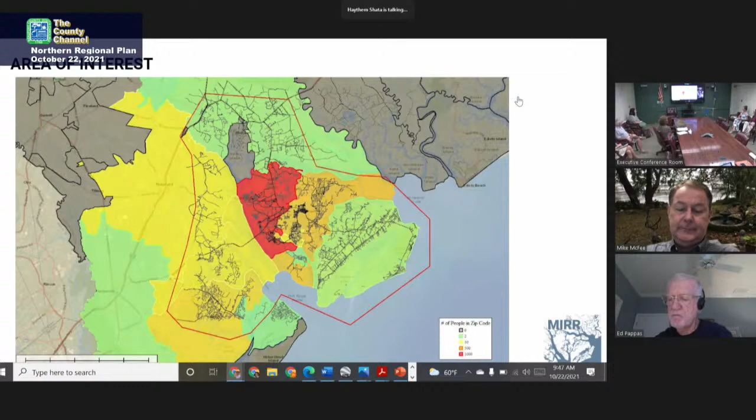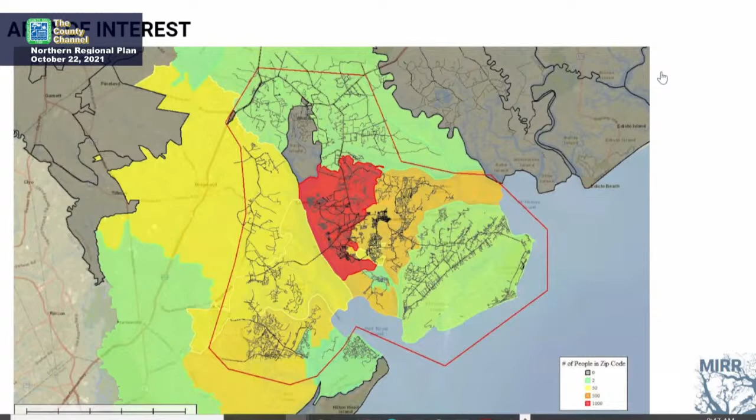Understanding the area of interest and its relationship to the military bases, what we're finding is the community is a large part of the infrastructure, and the infrastructure is a large part of the bases in the community. So that's part of why we aren't just focusing on the bases or immediately adjacent to the bases, but we're really trying to understand the threat, the impact, the unmet needs of the community, the risks involved, and the maps involved with understanding those risks, and creating a series of vulnerability assessments and priority assessments to define projects, responsible parties, and timelines. We are developing maps, and we started some vulnerability assessments, and we wanted to get your input on what we've identified so far.

OLDCC released some new framework items since we last met. Thankfully, it was very close to what we had already started producing. But where we are now is really putting together the assets, the hazards, the exposures, the probability, and understanding the consequences to prioritize and conceptualize impactful projects.

Where we are today is really, we'll show you some of the maps. We started some of the vulnerability assessments. We're hoping to come out there, look at things on the ground, have conversations with people and stakeholders, understanding and prioritize clusters and pilots that can really provide opportunities for impact, but also ability to be conceptualized throughout the study area.

This is kind of our doodle of what we've been doing. We really went from identifying, prioritizing, understanding typologies, starting to intersect those things and interleave with zoning, and validating that as we go with stakeholders and committees like you. Building off of that, we're hoping to apply toolkits that can be replicated and develop a phasing strategy that really understands how to address some of the issues in the community.

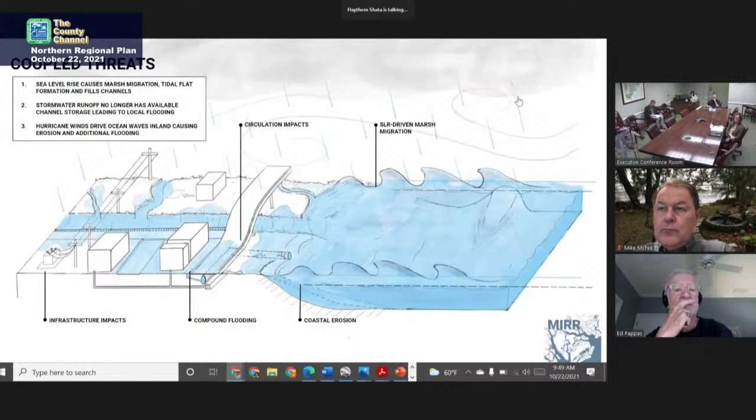This is what we showed you last time. There's really this coupled compounding issue that is occurring today, will continue occurring in the future, and there's low intensity processes that are changing. Your marshes are changing, your marshes are migrating, your marshes are eroding. And then there's also the high intensity event-based impact, flooding, storm surge that we've been building off of.

We reviewed this last time. We took some takeaways from stakeholders and takeaways from meetings. I think one of the most important things we noticed is how regional organizations are really taking initiative, and we should build off of that information and data and provide consistent collaboration, understanding that the military is critical to the community today and in the future, and educating the residents on their risks and on what they can do is an important part of the issue.

Understanding that the environment in the low country is a priority for your economy and your culture, and understanding that we should continue prioritizing cultural continuation in the community, especially with the military groups. And one part of this that we heard a lot of is that we really should think about our statistical findings and analysis in language that is approachable.

We try to simplify it, so please provide us feedback on if it's too simple or not simple enough on some of the recommendations. And we compiled data in a way that should hopefully be helpful for our exercise, but helpful for your future as well.

So there are really two things that we're analyzing. There's climate event, and there's community assets and services, and their interaction creates a risk. And building off of that risk, there's probabilities and there's consequences to those impacts. And so how do we prioritize it?

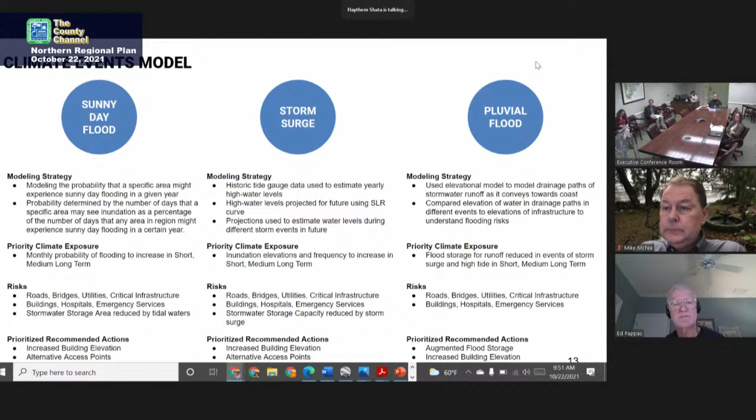Pluvial flooding really is the rain bombs. Your low points that are drained by infrastructure or stream, that when a very intense storm comes in, are areas where runoff accumulates. Building off of that, we looked at the community assets. We're still working on these. Understanding marsh is a strong cultural and physical impact, a physical part of the community.

We took a look back at erosion all the way to the 1800s, but we really started with the 1930s to 2016, highlighting areas where erosion has been a problem and where it can be approached.

For our storm surge and shallow coastal flooding, we showed you a graph last time, but this is more of a map. What we're noticing within this time period is that the risks of storm surge and shallow coastal flooding are approaching a similar elevation.

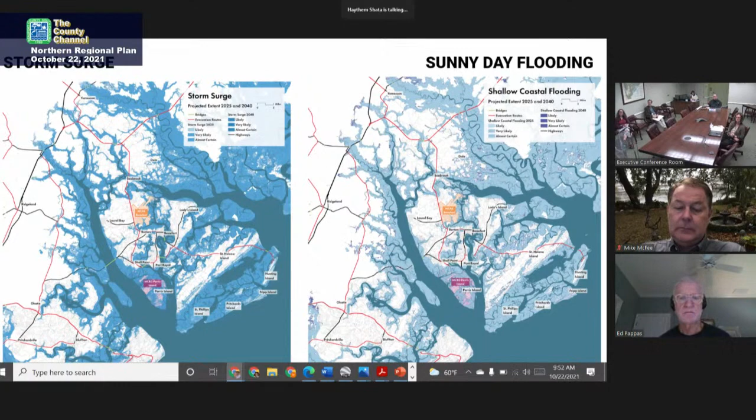So when we think about what you plan for with hurricanes and emergency response, those same impacts may need to be considered as tides get higher and shallow coastal flooding becomes more prevalent. You've probably noticed some sunny day flooding in your past—I heard the king tide last wasn't as high as normal—but some of those elevations do relate to your issues with storm surge.

Combining those two understandings means we need to start thinking about multi-layered resilient infrastructure, similar to what you've already implemented at Mossy Oaks, to address multiple threats and challenges.

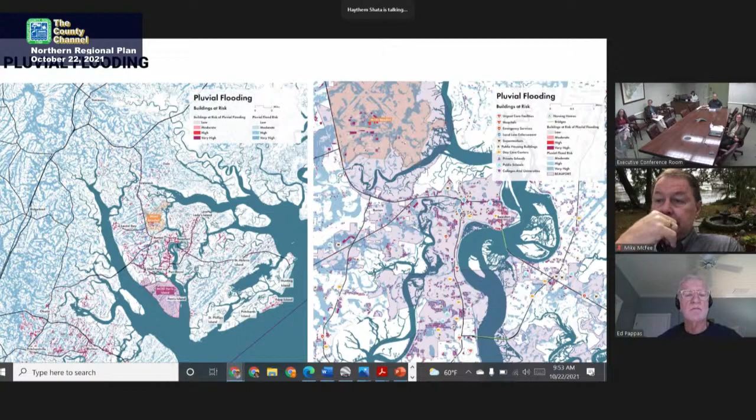Pluvial flooding is a different category, but a similar context—understanding where storage and stormwater areas exist, where they need to be improved or prioritized, and where future storm surge and tides may impact their ability to convey or store.

When it comes to marsh loss, you've probably noticed stands of trees slowly dying off. We are prioritizing areas that have risk of loss within one foot of tidal change or tidal range, and we are prioritizing the largest contiguous areas.

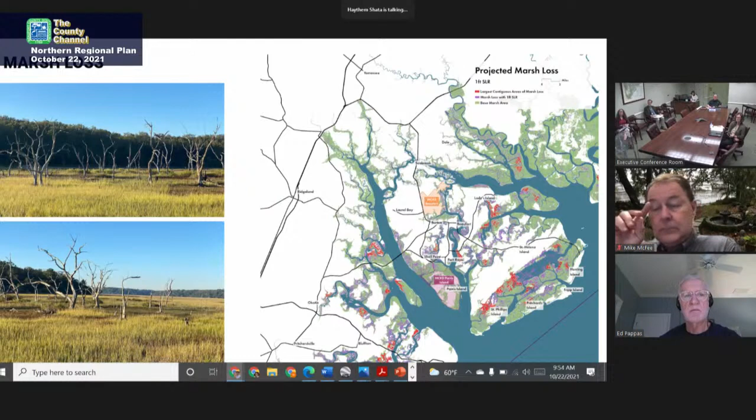We'll start intersecting that with areas of interest—cultural areas, environmental tourism areas—starting off with some of the data of your history, we can zoom in to where priority areas may relate to infrastructure and ecology. I'll take you through one example quickly, and then pause to get some input.

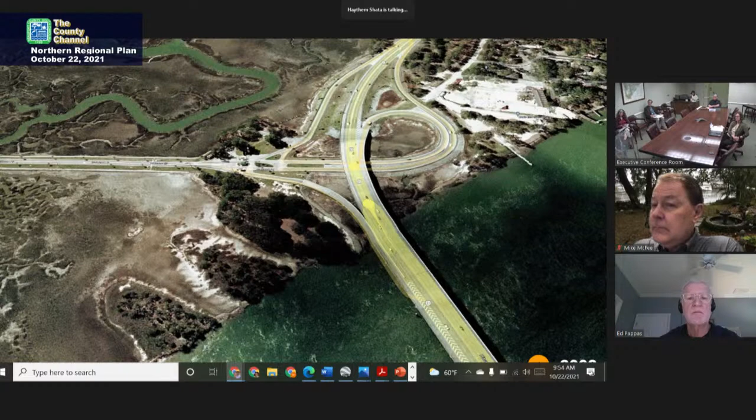One is the junction of 21. Looking back at history and understanding how it's changed is part of our understanding of what we can do.

What we found is when you start seeing the tidal impacts, erosion impacts, and the marshland slowly degrading, we realize there are opportunities for improving drainage and improving ecology in some locations.

Thinking about the resiliency of this causeway and this intersection when it comes to day-to-day events like sunny day flooding, and when it comes to larger catastrophic events that may require prioritization of evacuation.

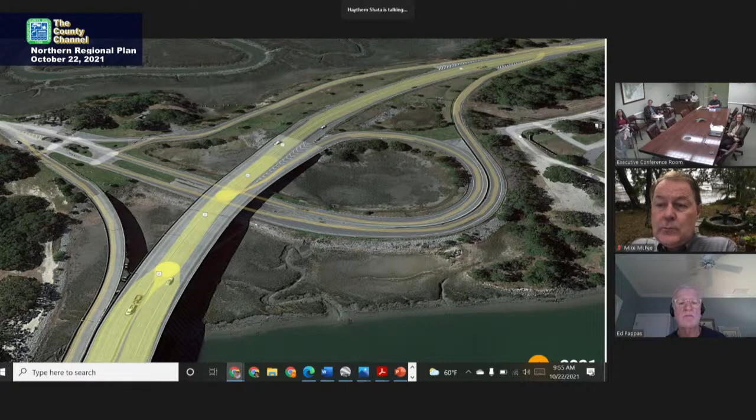What we found with this specific site is that it's a great opportunity and place for a living shoreline technique—embedding living oysters or oyster shells to help armor, but also accrete and allow this shoreline to grow over its lifetime.

I'll pause there and take any questions before telling you our next steps.

I volunteer to eat the oysters to get the shells out there.

This is at the Parris Island Gateway, correct? I'm sorry, I didn't hear that. Is this the Parris Island Gateway? Yes, ma'am. Okay, that's interesting.

Any questions before I keep going?

When you think about this specific area and what we're trying to understand regarding resiliency—you don't have enough room to solve all your problems. What we're trying to do is prioritize problem areas in ways that can be addressed.

When we think about this area's relationship to environmental services, the ecology that exists and used to exist, we also think about its relationship to evacuation and access routes, its impacts during rain bombs, and its impacts during storm surge.

You start understanding that areas like this can be prioritized for getting the most bang for your buck, thinking about future resilience as a way of prioritizing areas of most sensitivity first.

Building off of that is our next step. You saw one of our interactions and intersections, but we're going to do that throughout the county.

We're open to ideas in areas of already larger study. We've mapped your PUDs, we've mapped your areas of septic and water, really trying to understand where other areas have similar compounding issues that can benefit the community and the military as a whole.

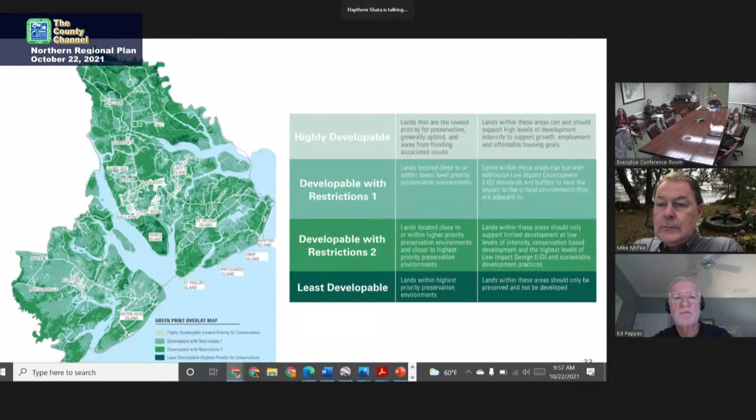We've started understanding the key takeaways and community survey priorities, understanding that not all areas want to be developed, even though it makes sense to develop with the data. We're prioritizing ecology and green infrastructure, understanding where the natural environment and the built environment intersect. We're finding great links between the two, and building off that to make sure our recommendations relate to the hierarchy or tiers proposed in the future development and zoning.

Maybe I'll pause there. We have a bunch of precedents, but I think you guys need to get back to the meeting, so let me know if you want me to keep going.

I would like to put you in touch with our stormwater people, if you haven't already talked to them about Shell Point. They just finished a study of Shell Point, and I can give that to Stephanie. Herrera and Neil Desai had a contractor do a study of that area. It's very similar to Mossy Oaks, and their recommendations would be valuable in your overall look at that area, which is right off of this gateway.

That'd be great. Our key goal is to make sure we have a short time frame for our study, make sure to integrate it with projects being studied, and really provide additional layers that can improve resiliency, but also improve funding opportunities.

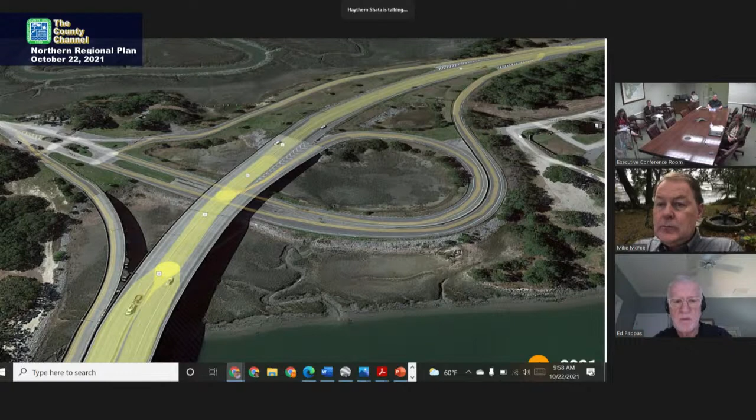I wasn't sure if anyone knows why it's called Shell Point. I'm imagining it's because there used to be a lot of oyster shells there, which is part of why we zoomed in quickly to this site. Mike, do you know the Shell Point history? I'm not sure exactly, but I know there was oystering on the Broad River side, so it's very likely that's where it came from.

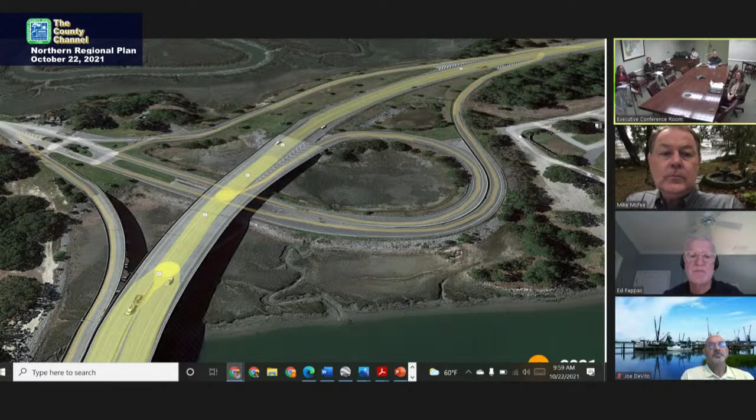When do you think you'd be ready to do the next presentation? And would that be a draft final, or do you have another intermediate step you'd like to do? Let me go back to our schedule.

One thing that's important too is anyone that wants to talk to us, please reach out. We're happy to present more detail with more information. Our goal is to meet with you, meet the technical committee, go on site, and understand what things look like on the ground, and have more conversations. We'll start compiling clusters and thinking about pilot projects and recommended actions, then come back to you and the technical committee, and probably come back again on site to show where these clusters and pilots are feasible and provide more context around those.

So I'd say we're hoping to come out there early November, first week of November is what we're shooting for right now. Happy to meet with any of you folks, and then come December again we're hoping to come out there before we really kick into the draft report in December and the final report in January.

Thank you. Who is on the technical committee? The technical committee is mostly made up of a staff representative from each of the jurisdictions, the county, and then from each phase, the CPLO or...

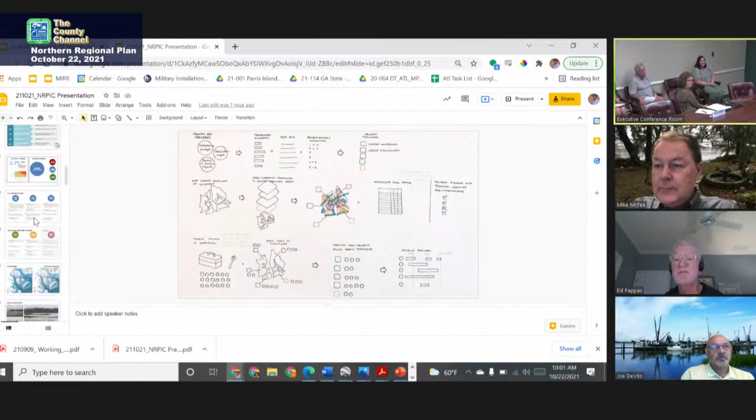Okay, who's the one from the county? Well, I've had both of you. Oh, okay, maybe I didn't realize it was a technical committee meeting that was. Yeah, we haven't had one in a while, and then we did the stakeholder engagement, which was kind of a mix, we went a little beyond the technical committee and expanded that. Okay, and Dr. Chris Marsh has also been active in the technical committee.

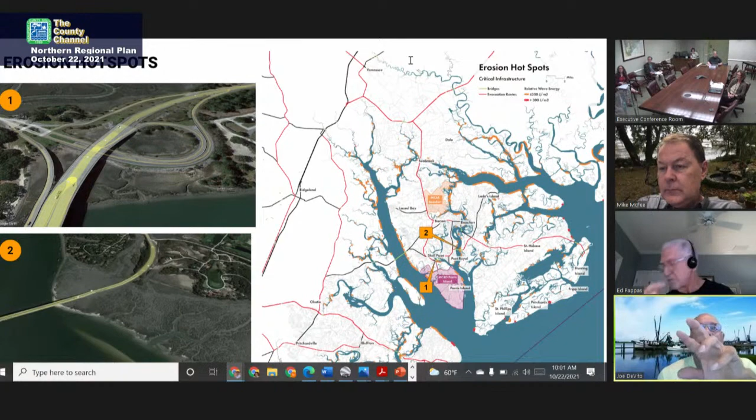Traditionally, Beaufort County has used sewer as an ability to control growth. Are we getting to the point that we need to think more about the fact that controlling growth with sewer may be the right thing to do, but allowing septic systems to exist in areas we want rural or less dense is hurting the environment? Do we need to think about that? Is that something your study is even thinking about?

That's exactly the map we're doing in progress right now. The reason I haven't pulled it up is we're playing with the colors and the data, and it's hard to combine your sewer and septic issues. But what we've already identified is where septic does not make sense - areas with soils that don't make sense, areas that will have common inundation, areas near water bodies or open water. Those are areas we're highlighting where septic does not make sense, but we're also highlighting areas where septic does make sense, because your sewer infrastructure limitations are gravity-based.

That doesn't mean there aren't areas where district-scale sewer infrastructure is possible, and maybe there are areas where even water reuse is possible, because one thing we're noticing is you have regional issues when it comes to your wells. Understanding where your needs for wells, septic, domestic water, and sewer are is part of what we're compiling right now. And we got all the data, surprisingly.